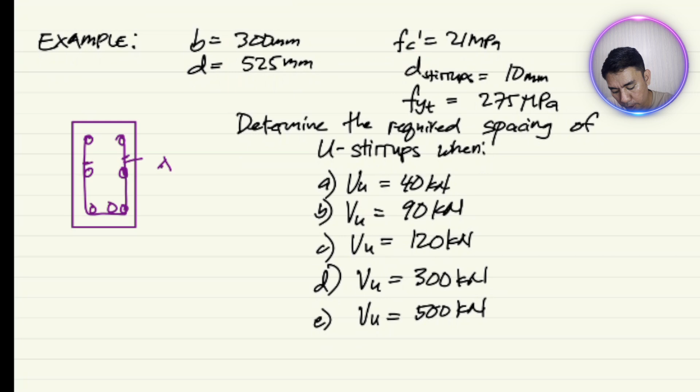So, determine the required spacing of U-stirrups. We have a series of example values of VU, starting from small up to large spacing of VU. In practice, our VU varies from support to the middle, right? It slopes down, large from the shear diagram near the support down to small as it approaches the middle. So the first case is VU is 40 kilonewton, increasing up to 500 kilonewton.

So our very first step is we need to determine the shear capacity of the concrete alone, because that's our basis for whether we still need to add reinforcement or not, or even just provide the minimum. So we need to solve for the shear capacity of the concrete.

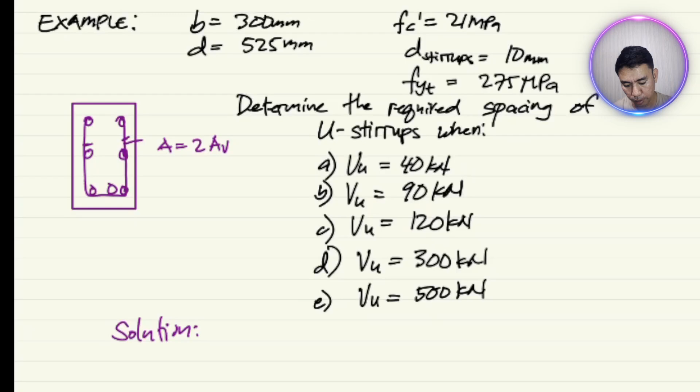Okay, I haven't written the second problem yet. Anyway, here's the solution.

Start with VC. What is our VC? VC is equal to 1/6 lambda square root of FC prime, BWD. So that is 1/6, lambda is 1, square root of 21, and BW is 300, and D is 525. We have VC is 120.293 kilonewton.

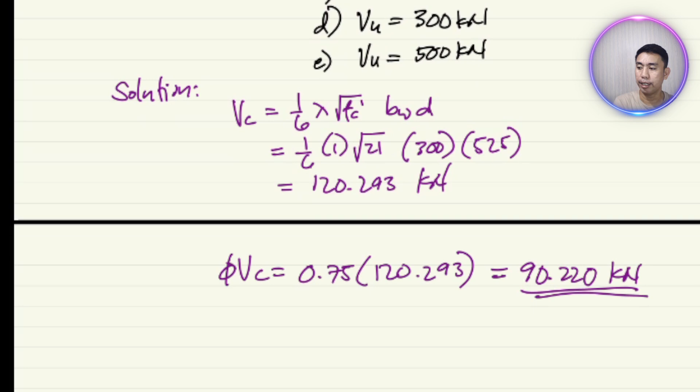Now our phi VC, what is that? Our phi is 0.75 times 120.293. So our phi VC is equal to 90.220 kilonewton.

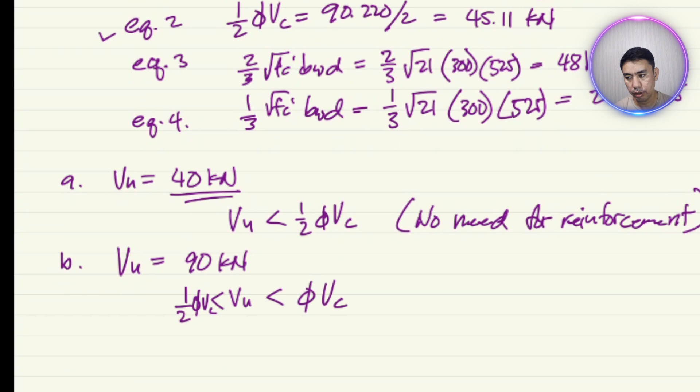So here, our VU is greater than one half of equation 2, VC, but it is less than VC. So it's in between the shear capacity and half of the concrete shear capacity. That means we provide minimum shear reinforcement required.

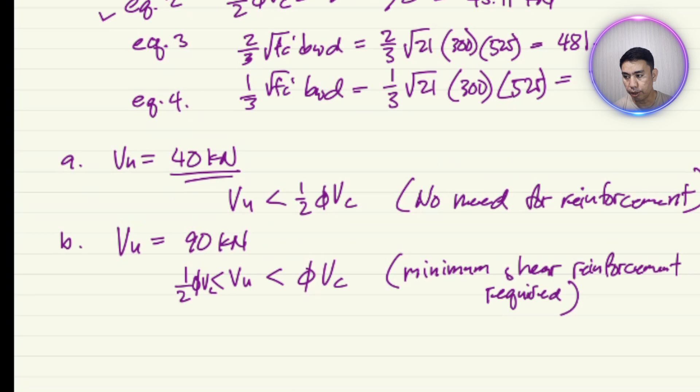Minimum shear reinforcement required. What's our equation? We have AV minimum equal to 0.062 square root of FC prime, BWS over FYT, should be greater than or equal to 0.35 BWS over FYT. That means we can solve for S1. There are two S here. Our S1 is AV minimum, FYT over 0.062 square root of FC prime BW.

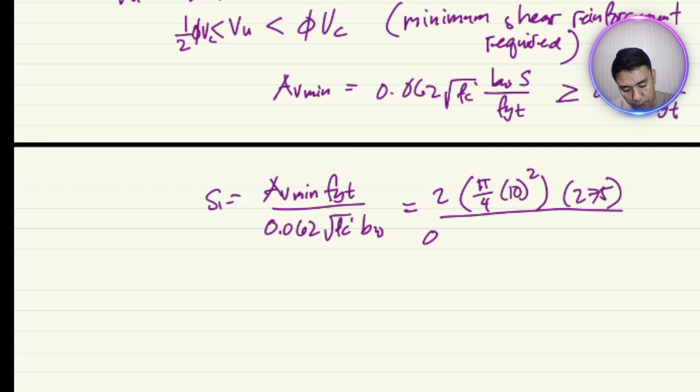So here, what is our AV minimum? This is the area of shear reinforcement. The area, since it's U-shaped, has two verticals, so we put area as 2. The area here is for a 10mm stirrup. So the area of 10mm is pi over 4 times 10 squared. Times FYT, which is 275 over 0.062 square root of 21 times 300.

So the minimum spacing is 506.79.

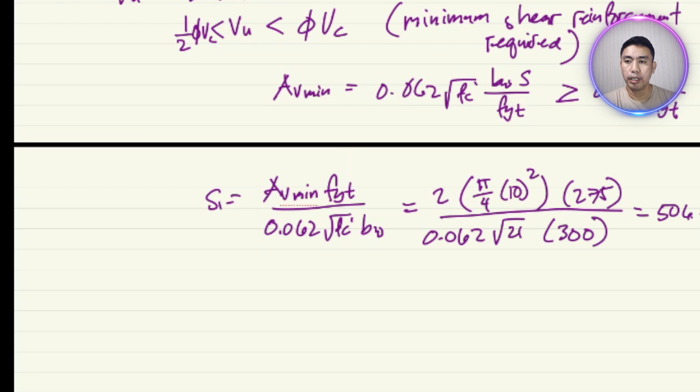Now for the second equation: S2 is equal to AV minimum, FYT over 0.35 BW. Same as before, 2 times pi over 4 times 10 squared, and then 275 over 0.35 times 300. This is 411.399. But that's because concrete can handle it.

But we need to provide a minimum reinforcement. So even though we provided the minimum, we still have to check it against the maximum stirrups. What is the maximum stirrups?

This is D over 2. This is 525 over 2, which is 262.5, or 600. Sorry, let me write it here, or 600. Or the second one, D over 4, or 300.

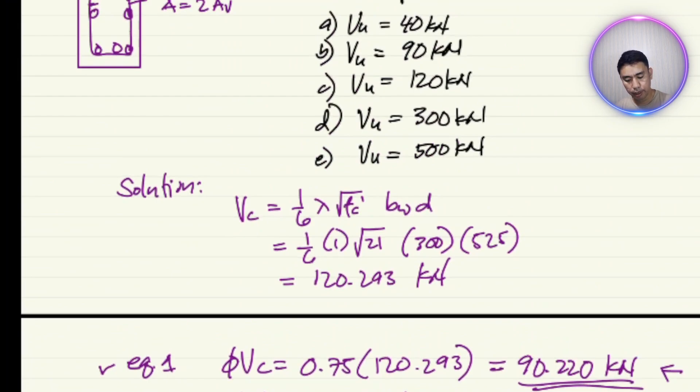So what do we need? We need VS. VS is VU over phi minus VC. We already solved VC here, right? Yes, here it is. Let's solve VS here.

VS, our VU is 120 over phi, which is 0.75, minus 120.293. This is equal to 39.707 kilonewton. Now we need to check this VS value against our equations.

These two, equations 3 and 4. If it is greater than 1/3 or greater than 2/3 - our VS here is 39.707. What does this mean? Let's compare it to 1/3. It is less than 1/3, and also less than 2/3, and also less than 1/3.

That means we're okay to solve, because if it were greater than 2/3, we'd need to change the section. So we can write VS is less than 2/3 square root of FC prime BWD, and this is also less than 1/3 square root of FC prime BWD.

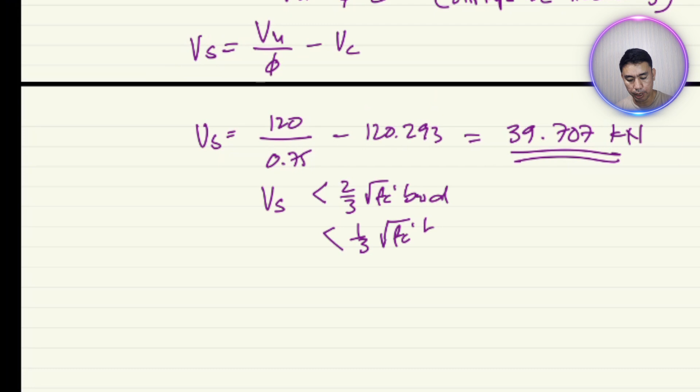So our S is equal to AV FYTD over VS. This one is 2 times pi over 4, 10 squared, 275 times 525, over VS, which is 39707.

By the way, the output of square root of megapascal, the square root of FC prime, the output is still megapascal. It's just an empirical formula, derived through laboratories, not by normal theoretical analysis.

So 39, VS will use Newton, 39707 Newton. So the spacing here is 571.143.

So S is equal to the minimum, the smallest of the three: 571.143, and the S minimum, let me check... this is for your letter C. Okay, 571, and then D over 2, and 600.

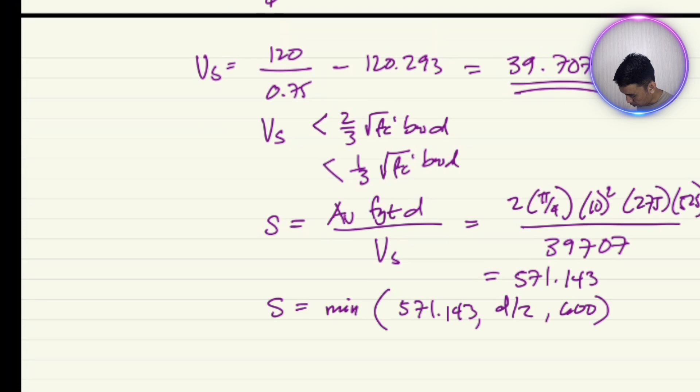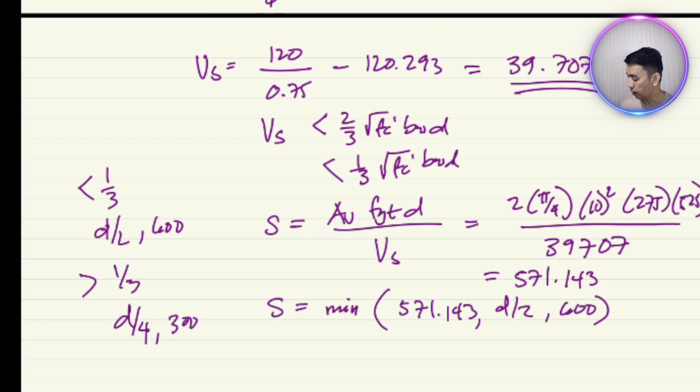Because it's less than something - if less than one-third, it's in the table. I didn't include that part in the lecture, but if less than one-third, it's D over 2 or 600. If greater than one-third of FC prime BWD, it's D over 4 or 300. In our case here, we are less than one-third, so this is D over 2 and 600.

So that's why we have a value. What's the smallest? 571.143, D over 2 is 262.5... wait, I'm not sure if that's 260. Yeah, 262.5, and then 600. So S here is equal to the minimum of the three: this is 262.5 millimeters.

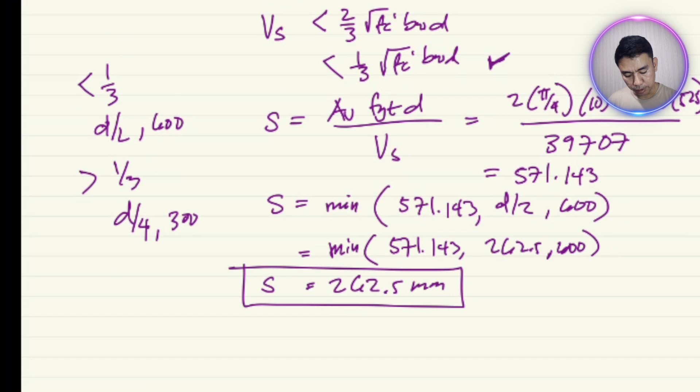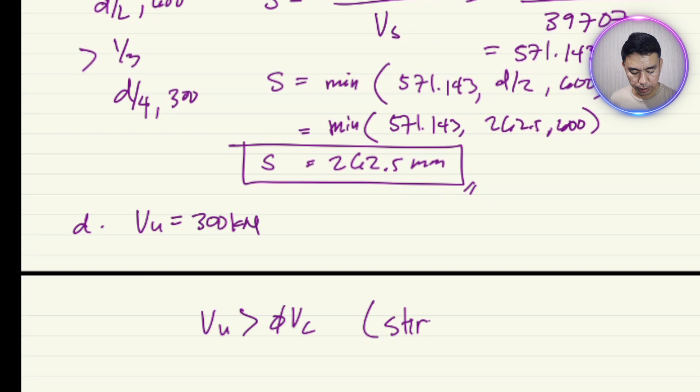Another case, letter D, when VU is 300 kilonewton. Check natin sa phi VC. VU is greater than phi VC, that means stirrups are necessary, pag greater than phi VC siya. And then we can solve for Vs here.

Ano yung Vs? Vu over phi minus Vc. So this is 300 over 0.75 minus Vc natin is 120.93. So we have 279.707 kilonewton. Okay, check natin siya sa yung 2/3 at saka 1/3 square root of FC prime.

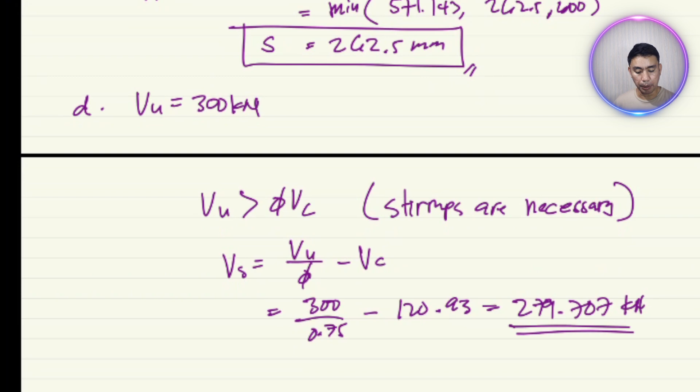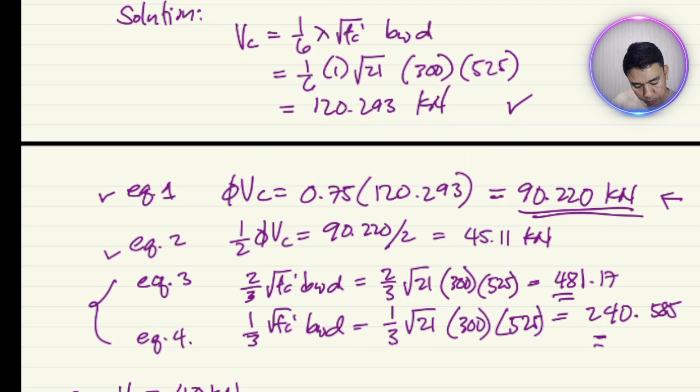Okay, so you can see here, ang Vs natin is less than 2/3 square root of FC prime BWD. Bakit? Ano yung square root of FC prime? 2/3 is 481, right? This is 481 compared to 279. So this is less than 2/3.

Compared to 1/3, this is greater than 1/3 square root of FC prime BWD. Okay.

So spacing, the same, yung spacing natin, this is AV FYT D over VS. So ang AV natin is 2 times pi over 4 times 10 squared, FYT 275 times D of 525, over VS 279707. We have 81.079

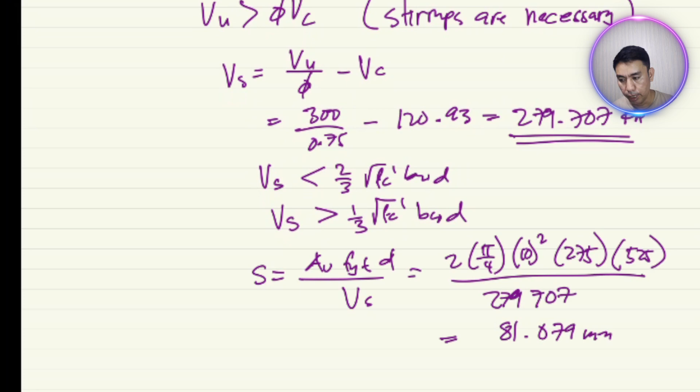millimeter. Ano yung max spacing natin? Max, pag greater than 1/3 siya, it should be D over 4, which is 525 over 4, is equal to 131.25, or letter B, or 300.

Okay, so here, ds is equal to yung minimum na value. We have 81.079, 131.25, or 300. Here, minimum is 81.079 mm. So if you can see here, ang spacing natin, lumalaki yung shear, yung VU, lumiliit yung spacing na nasa-solve natin. Okay, so we're down to 81 millimeter.

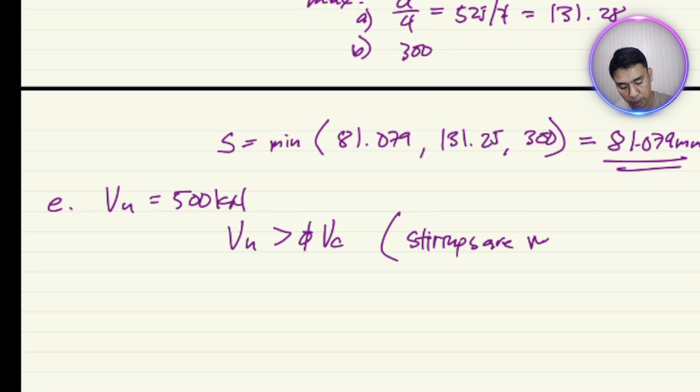In the case of letter E, how about ang VU is 500 kilonewton. So here, VU is obviously greater than phi VC. So what does it mean? It means stirrups are necessary.

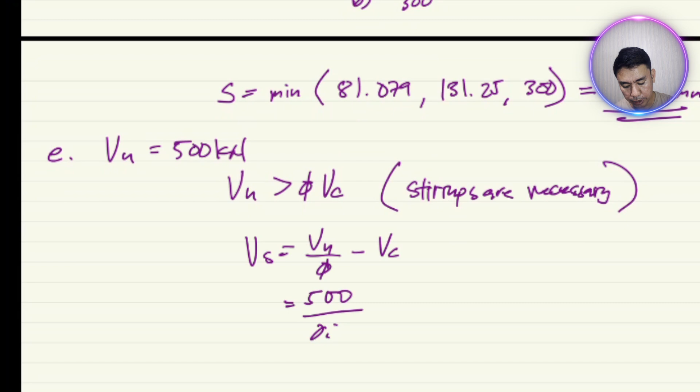Now let's solve for VS. VS is equal to VU over phi minus VC. This is 500 over 0.75 minus 120.293. So we have our VS here is 546.374 kilonewton. Now compare ang VS natin, i-compare natin siya sa 2/3.

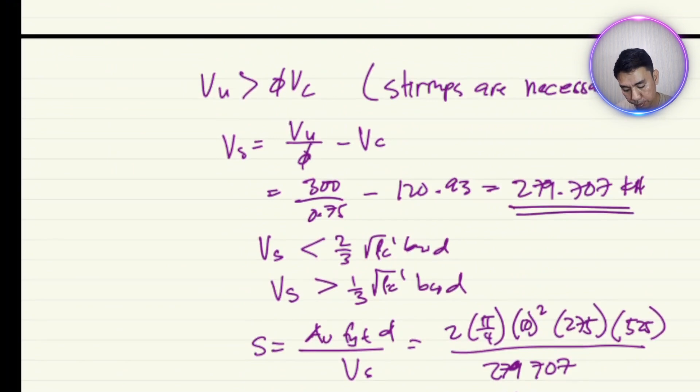Ano yung 2/3 natin? Ang 2/3 is itong equation 3, 481 only, right? So what does it mean? 481, ang actual natin is 546. So we say VS is greater than 2/3 of square root of FC prime BWD.

Kung greater than, ito na yung case na beam size is not adequate. So what does it mean, sir, kung beam size is not adequate? Meaning, we need to suggest na i-increase natin yung dimension ng beam. Okay, so that's the case.

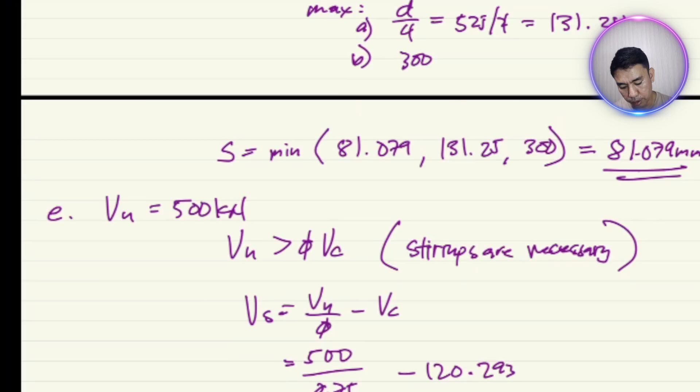So madali lang i-increase. Dito na lang, consider natin yung BWD, yan yung area. Right? So increase natin, make sure na at least greater than VS siya. Alright, so you see the different approach or different steps kung different values ng VU.

Okay, let's solve a practical problem. Ito na yung pag-design ng actual spacing. Kasi nga mag-iba-iba yung shear, so iba-ibahin rin natin yung spacing. So in this second example, di ko nasulat yung problem, so yan, ako na lang.

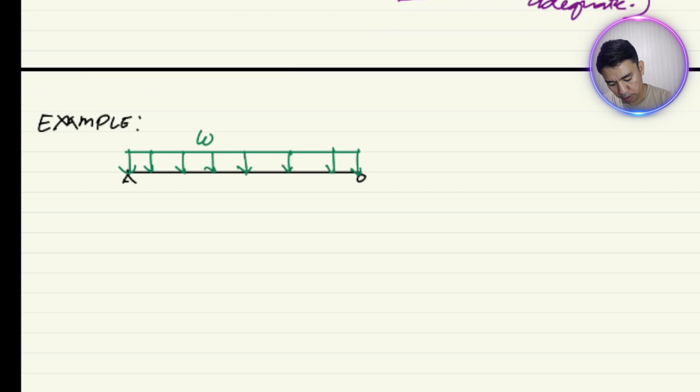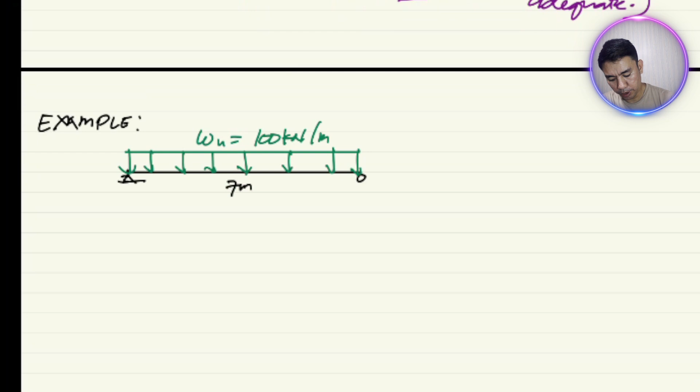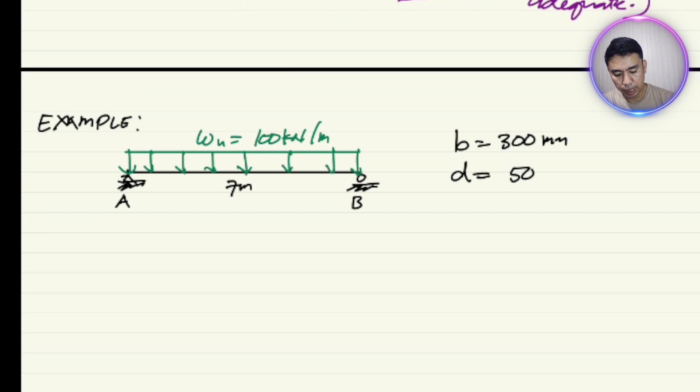Another example. Here we have a simply supported beam with a uniform load omega u of 100 kilonewton per meter, okay? And this is 7 meters. This is point A, this is point B, this is pin supported. We have B is 300 mm or BW, D is 500 mm, and then FC prime is 20.7 megapascal.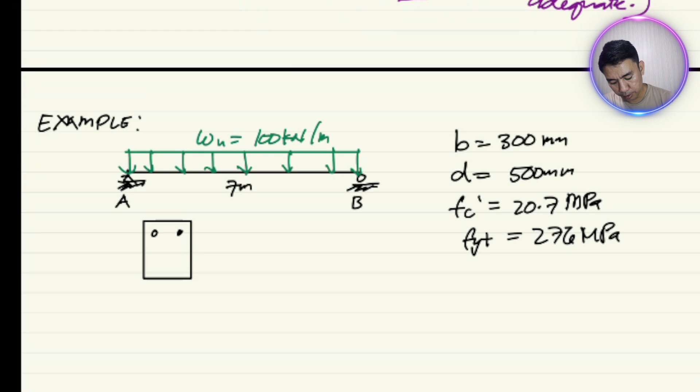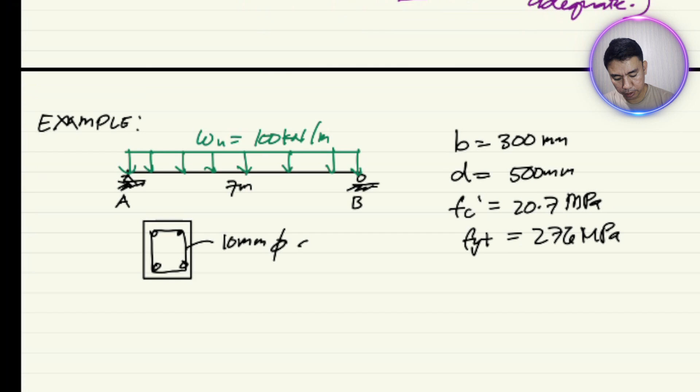And then FYT is equal to 276 megapascal. Okay, so ang section niya is parang ganito. Ayan, this is a 10 mm diameter stirrups. Now let's design the shear reinforcement of this beam.

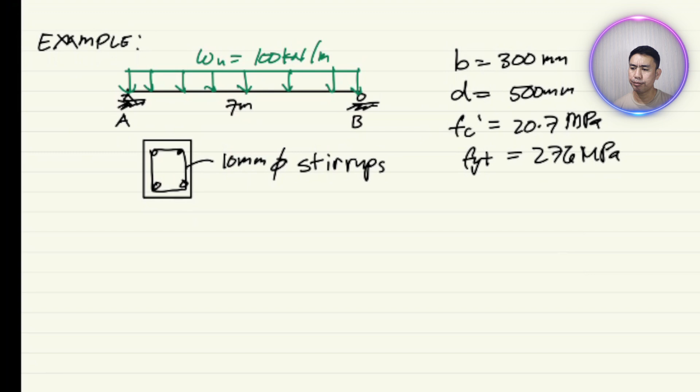So before we can design, we need to solve the shear capacity, actual shear diagram, right? So we need to solve yung equation na muna natin ng shear diagram. So is the solution. Let sum of moment at A equal to 0. If sum of moment at A equal to 0, we have RB, reaction at B, times 7. This is equal to omega U times 7 times 7 over 2. I hope that's gonna be easy for you to solve the reactions.

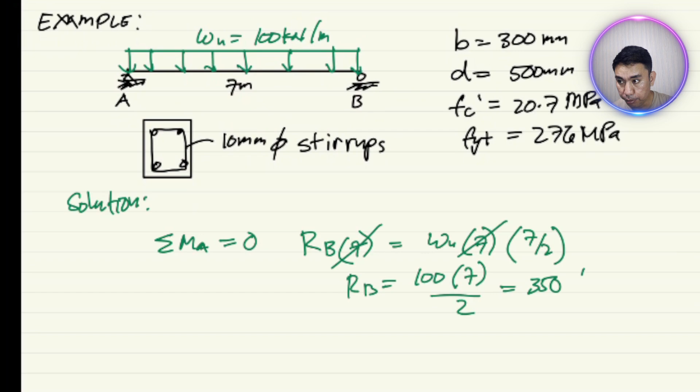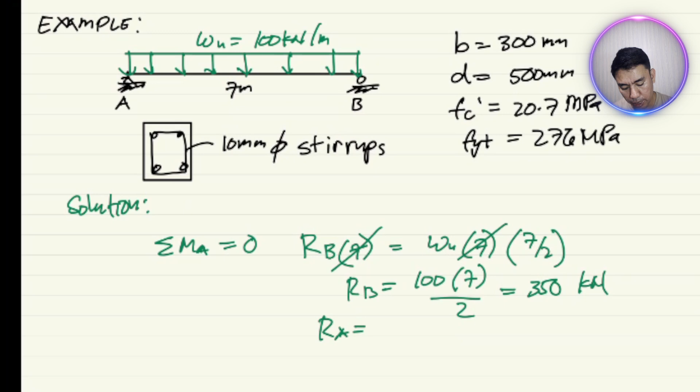So RB is equal to 100 times 7 over 2, cancel na itong dalawang 7, so this is 350 kilonewton. We can solve also RA, but if you can see here, parang symmetrical naman siya, so we expect na ang RA is also 350 kilonewton. So if I'm gonna draw the shear diagram, again, sa pag-design natin, yung sa isang side lang i-design natin and then i-apply na natin sa other side. So lakihan ko na lang ha. So the shear diagram here, half ng beam lang ito ha.

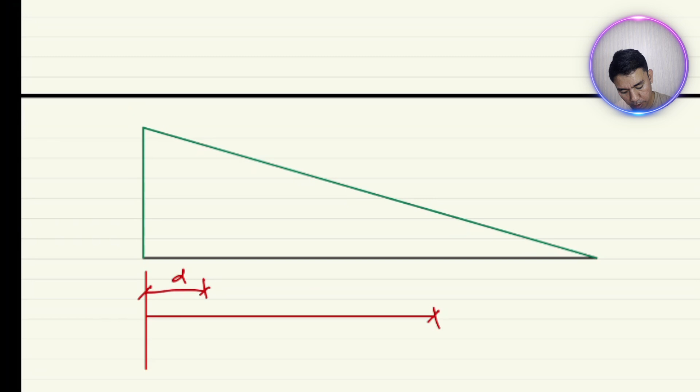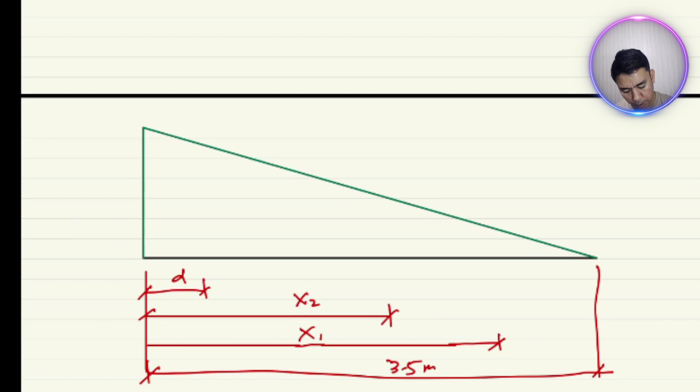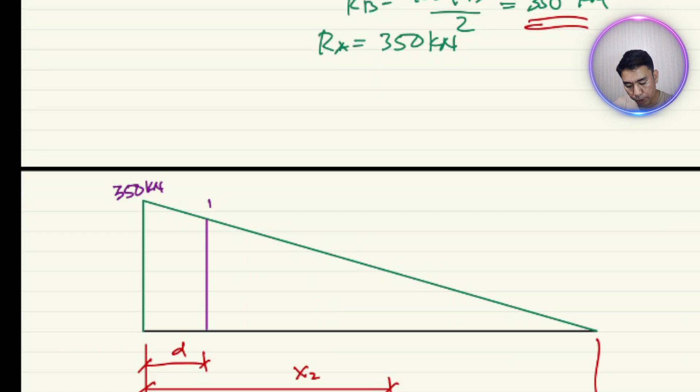3.5 meters. This is the VU we solved, 350. So this value here is 350 kilonewton. But again, our critical shear is here at the D distance. This is the VU.

So we need to solve for that height of VU, this x2. This is the distance where VU equals the shear capacity of concrete. And then this x1 is half of φVc. Beyond half of φVc, no reinforcement is needed. Between φVc and half of φVc, we need to provide minimum reinforcement. Between VU and φVc, we need to solve for spacing S - this is S minimum.

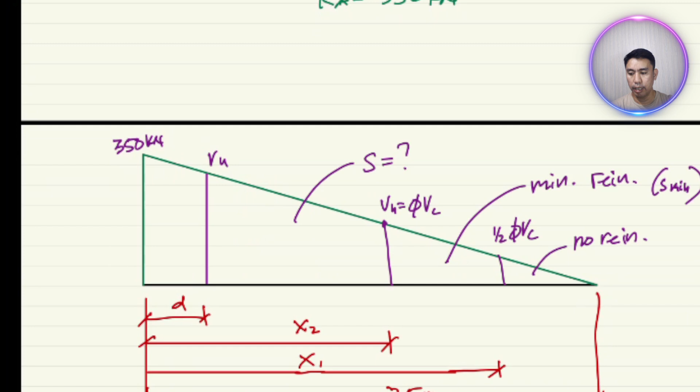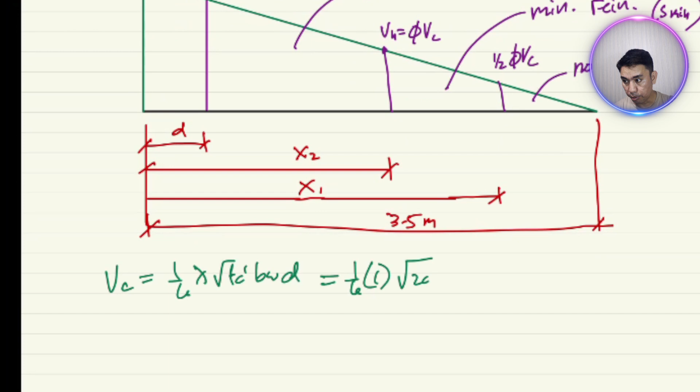So we'll start by solving the values of VC. What is VC? VC equals 1/6 lambda square root of FC prime BWD. So this is 1/6 square root of 20.7 - lambda is 1 times square root of 20.7 times 350 times 500. So our VC equals 132.700 kilonewton.

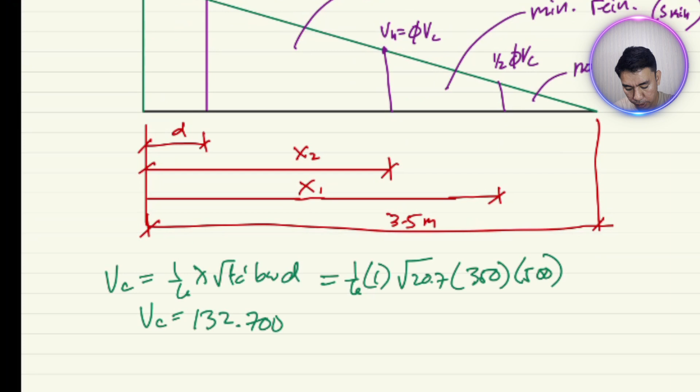What is phi VC? Phi VC is 0.75 of 132.700. This is 99.525.

And then we need to solve the 2/3 and 1/3 square root of FC prime BWD. This is 2/3 of square root of 20.7 times 350 times 500, which is 530.801 kilonewton. Then 1/3 square root of FC prime BWD is 1/3 times square root of 20.7 times 350 times 500, equal to 265.401 kilonewton.

Now we need to solve - we have VC, phi VC, and half of phi VC. So phi VC corresponds to the distance x2. So we need to solve x2 and also x1, by ratio and proportion.

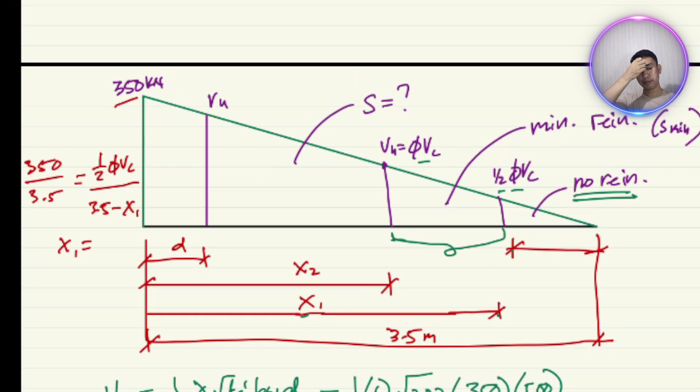Because what is x2? The range from x2 to x1 - what is that? In that range, from x2 to x1, we need to provide minimum reinforcement. So, what is that? X2 to x1, so we need to solve.

Same as before, ratio 350 over 3.5. This time it's not one half of phi VC, but the full phi VC. So what is phi VC? 99.525. And this one is 3.5 minus x2. Here we solve x2 equals 2.505.

So that means 2.5 meters from the support up to 3 meters from the support, we need to provide minimum reinforcement. So x2 to x1 requires minimum reinforcement. We have the value for minimum.

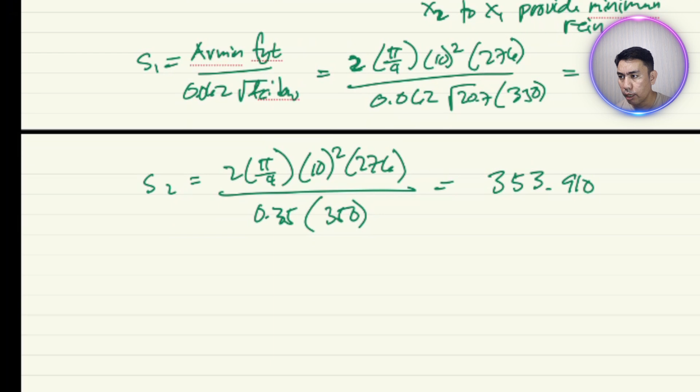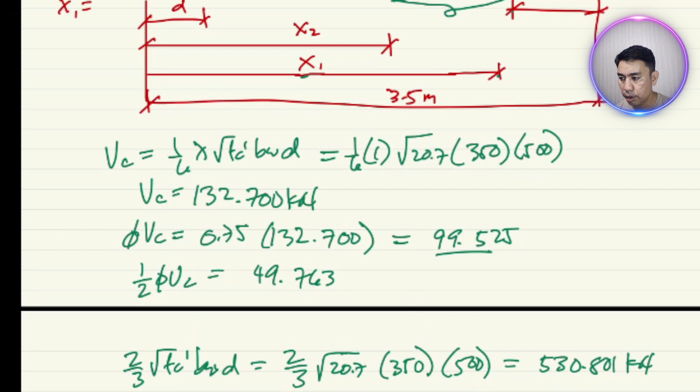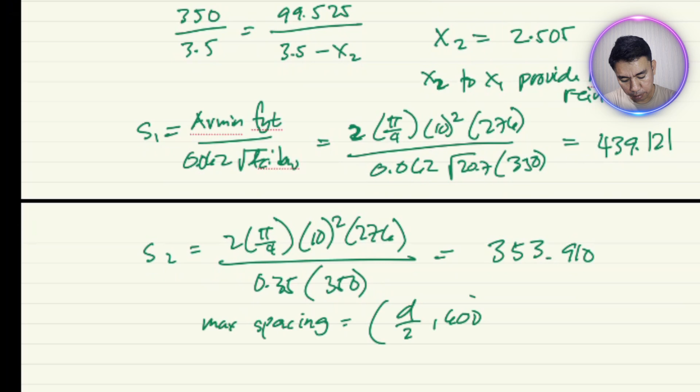But our maximum spacing is - what's our VU again? Have we solved VU? VU here, yeah we can use this since it's minimum - expected to be less than minimum reinforcement, expected less than one-third. That's the shear here, so we need to compare this to our max spacing. What I used here - D over 2 or D over 4? But this is D over 2 and 600, since it's less than one-third in this part. So this is 500 over 2 and 600.

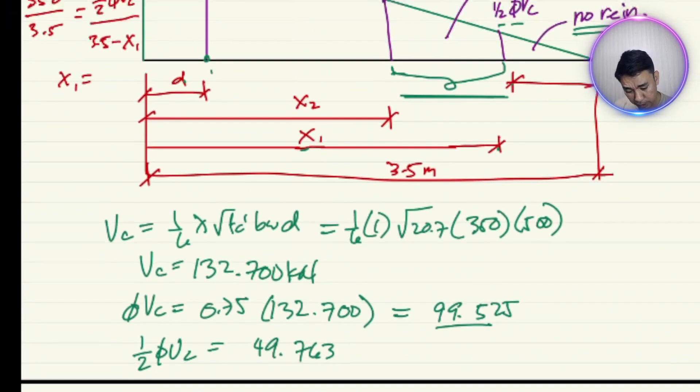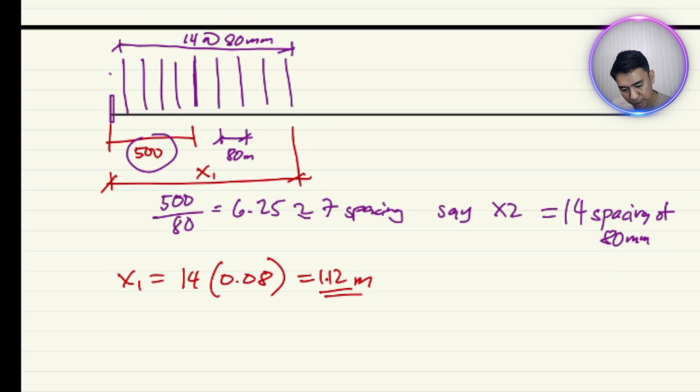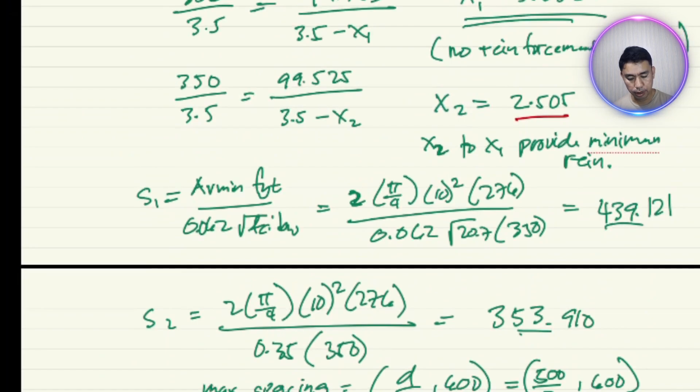Kasi yung X2 natin, itong X2 is yung phi Vc. Ang X2 natin is hanggang 2.505. So ang naabot lang natin is hanggang 1.12. So hanggang maabot tayo sa 2 point sa X2 natin, 1.12.

So we need to solve at a distance. You need to solve again a new shear value. From D, kuha natin yung shear value, and then kuha tayo ng spacing, i-move natin siya. I-atras muna natin siya kung ano yung ma-solve natin paatras sa D, and then ito times 2 lang natin. Practice lang yan.

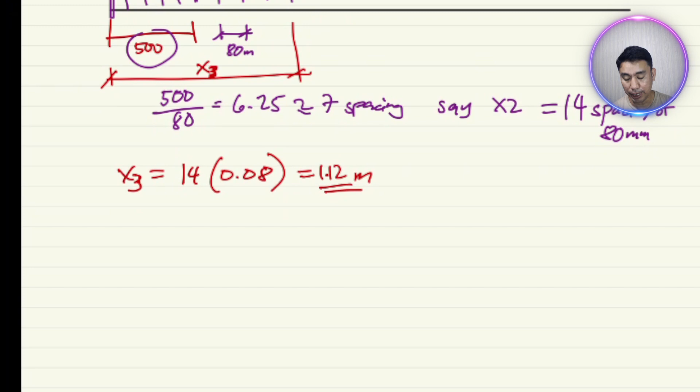Actually, kahit hindi ganun na practice, basta mag-change talaga yung value ng VU natin. Palit ng palit. So yung spacing is lalaki yung spacing. Ito lang ginagawa ko sa practice para hindi masyadong malito. Although kung nalito na kayo dito, isipin niyo kung sa practice mas talaga siya, mas malito pa kayo.

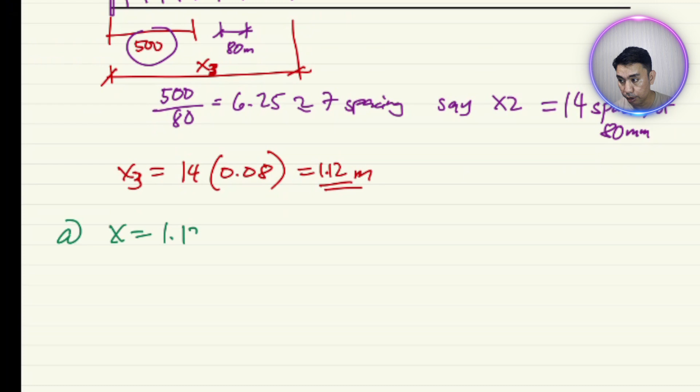14 times 0.08. So mayroon tayong, that means isolve natin at x is equal to 1.12. Solve natin yung VU. So this is VU over 3.5. Ito yung ratio and proportion. Minus 1.12 is equal to 350 over 3.5. Ano yung VU dito? VU is 238.

Okay, so kung 238, solve for VS again. VS is equal to 238 over 0.75 minus 132.700 equal to 184.633. Okay, and then once meron na tayong VS, solve for spacing. 2 times pi over 4 times 10 squared times 276 times 500 over 184.633 times 1,000. We have a spacing.

Tingnan nyo, ang spacing dito, lalaki na siya. 117.406. Again, this is millimeter. So mahirap ito sa practice. So i-round down natin. Say, 110 millimeter. So we use 110 millimeter.

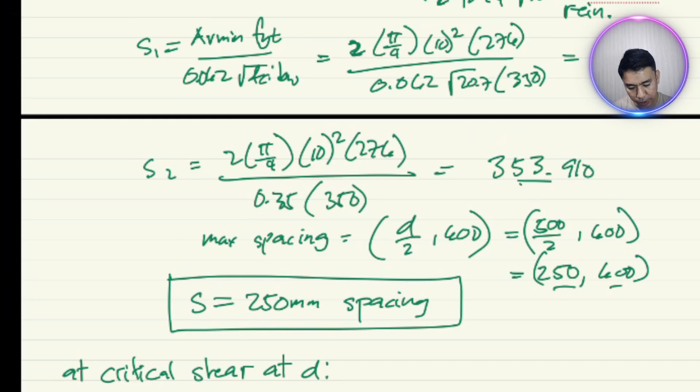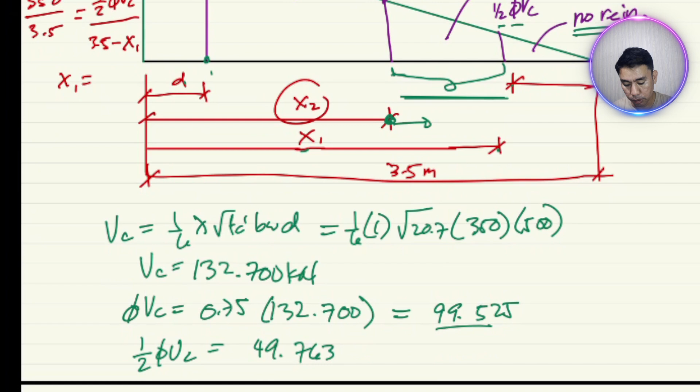So ano yan, yung critical nga natin is, yung shear X2, ang X2 natin is, kasi hanggang X2 lang tayo. Beyond X2, yung minimum reinforcement na lang. Kasi nakasolve naman tayo ng minimum reinforcement. So hanggang X2 lang. Ang X2 natin na value is 2.505. So i-solve natin niya.

So 2.505 minus, nag-start tayo sa 1.12. This is 1.385. Okay, and then ang spacing natin dyan between 1.12 to 2.505.

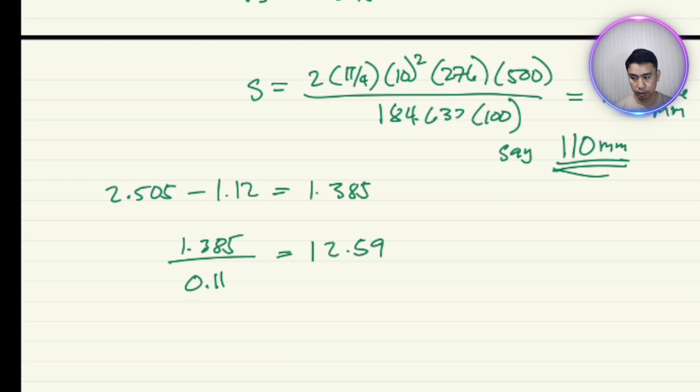Ang spacing natin is 110 millimeter. So divide natin 1.385 divided by spacing na 0.11, gawin natin meter. So this is equal to 12.59. So dito naman sa number of spacing, kung mag-round tayo, round up. So this is 12.59 na spacing. Let's say 13.

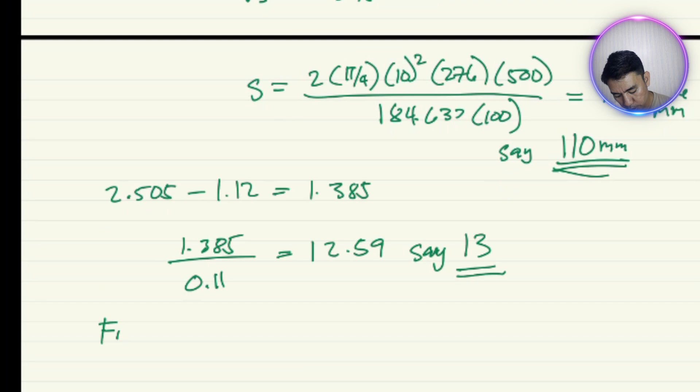Okay, so ang final spacing natin is ano yun? 14 at ganyan ang pagkasulat sa doon sa blueprint sa plan natin. 14 at 80 mm, di ba? 14 yun na 80 mm.

And then, comma, 13, 13 at 110 mm. Okay, and then, the rest. We say the rest is, ito yung minimum. Ano yung minimum? Yung minimum natin, dito na area. Kumbaga, somewhere here, ito yung first spacing dito. Ang gulo na ng ano. Ito yung first spacing, S1, and then solve natin yung S2.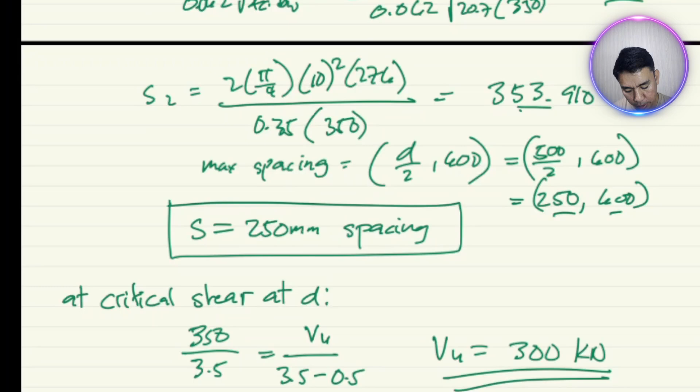Ito yung S minimum, right? Nag-guess niyo? So yung first na S1, then S2, then S minimum. Kaya ito yung S1 natin. Ito yung minimum spacing, S250. Kaya ang nilagay natin, ang S1 natin, ito yung S1, 14 at 80, S2, and then S minimum. So ang pagkasulat dyan, 14 at 80, comma, 13 at 110, and the rest is, rest of the reinforcement is at 250 mm.

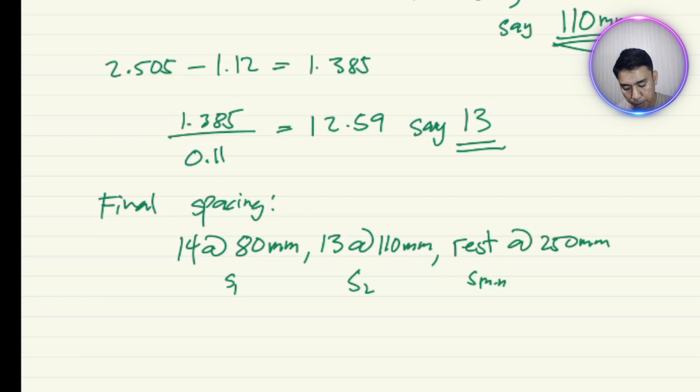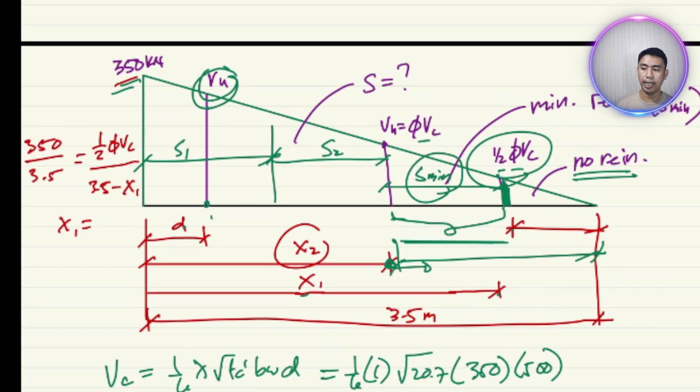Although practically, or theoretically, ang reinforcement natin is hanggang dito lang, yung half ng phi Vc. Pero in practice, kung ano yung makuha natin na S minimum, i-apply na natin yan hanggang sa gitna. Okay, we can put that up sa gitna. Konti na lang man yung difference dyan. Okay, at least sa gitna, meron pa rin. Ayan siya. Kaya nilagay na, the rest is at 250 mm.

Okay, so maybe at first hindi nyo mag-gets, but ulit-ulitin nyo yung video on how I explain this one. And then ganito yung sa practice. Sa book, iba yung pagka-explain sa book. Ang pag-determine ng book niya is iteration, which is mas perfect yun siya, kasi nga, every 0.5 meters yung ano niya.

Sa akin, iba naman, medyo practical ito kasi at least hanggang tatlo or apat na calculations lang tayo. Okay, we have S1 and then i-apply medyo i-times 2 mo lang yung S1. Although sabi ko nga, hindi mo pwedeng i-apply lahat yung S1. Meaning isang calculation lang, 80 mm, i-apply mo agad yan sa lahat ng reinforcement. So it's not practical, it's not economical. So ganun na rin, hindi rin siya practical.

So we solve S1 and then, let's say 14, and then change naman tayo ng VU. Ayan. Iba naman yung spacing. So, 13 and then the rest is 250.